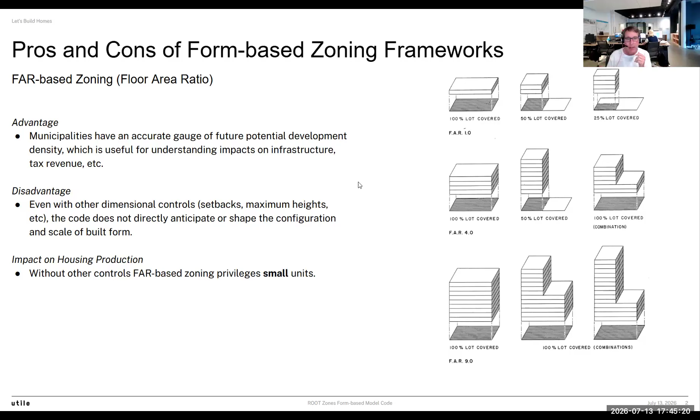In suburban locations, dwelling units per acre is typically the framework that's used. Towns prefer this because the number of dwelling units per acre means it's relatively easy to calculate infrastructure impacts, sanitary and water, and it's also a way to get a handle on households relative to planning around schools and the population of schools.

In communities where the real estate market is hot, like the western and northern suburbs of Boston, dwelling unit per acre generally privileges large units because if you can do 2 units per acre, the rate of return on your investment is going to be higher if you build 2 McMansions versus starter homes, and so that tends to be the market impact of those.

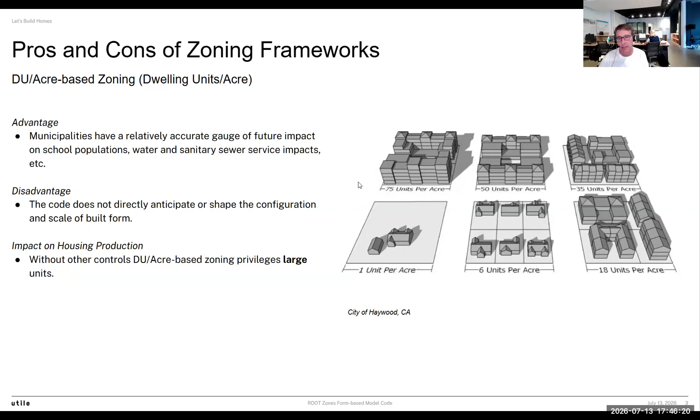A building type called a multiplex, which is really based on 6-unit buildings that are really 2 triple deckers brought together. All of the rules for the multiplex are laid out with a graphic of that building type shown. And then in some districts in the city, multiplexes are one of usually a couple of building types that are allowed.

The challenge with form-based zoning is that for many municipalities, the number of rules is overwhelming for a staff, especially for a staff that doesn't have architecture training, because it's a very architect-y kind of framework. So even the city of Somerville is rethinking some of its zoning now to make it a little bit simpler for those reasons, that it's been a little bit difficult to review and enforce.

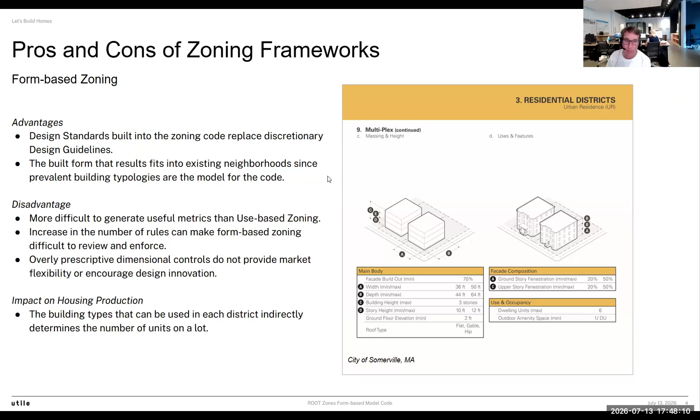In fact, Camille and I are working on that rezoning of the rezoning project. What we're recommending is something we're calling form-based lite, which is a much simpler form-based zoning that's based on really just 2 principles: a maximum building footprint - and if you think about the little plastic houses of Monopoly, that has an important impact on the size of a building that can be built - and then the building height, which is primarily expressed in number of stories, but also can be expressed in feet.

In most jurisdictions, a maximum height expressed in feet is also desired politically too. And then for some of the lower transects, a roof form requirement, which tends to be a pitched roof. So in essence, those three ingredients constitute the zoning, and this is the framework instead of dwelling units per acre or FAR or a more complicated form-based code.

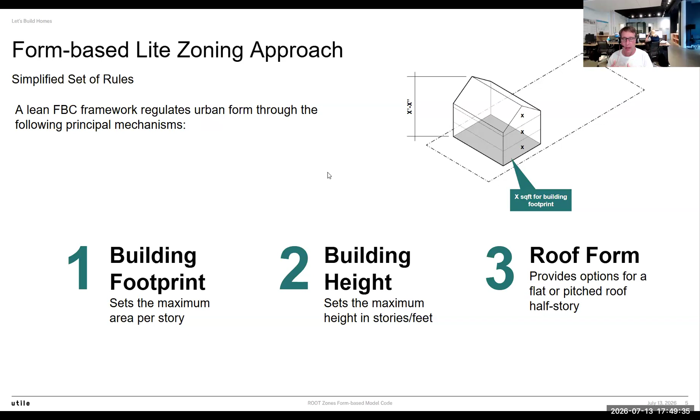That's just a graphic of the footprint in gray, the number of stories, and where roof form is impacted. That third floor in this case has to be under a pitched roof with certain numbers of qualifications.

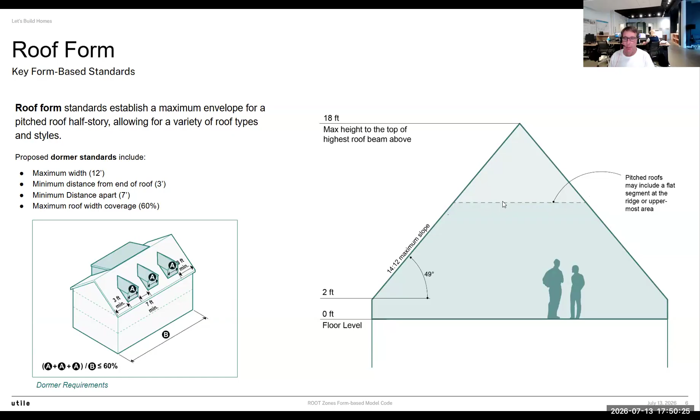Often, by the way, builders or developers will make that top of the roof flat and not bring the pitch all the way to the top.

Because the maximum footprint is fixed, you're allowed, like Mr. Potato Head, to attach things to the building volume that exceed the footprint. That includes bay windows, in some communities balconies, awnings, and even porches. And that in a way is an incentive for developers to add those things because they're a way to exceed the footprint, and it's a way to encourage the market to maybe articulate new buildings more than they would otherwise.

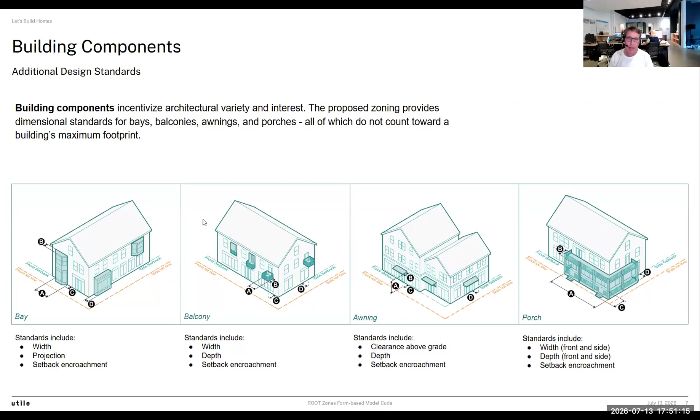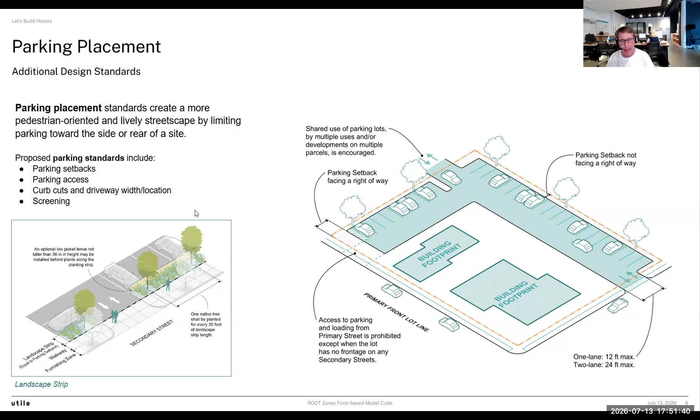So those are all of the add-ons that we typically include as part of the form-based lite recipe. And then what we tend to focus on is where parking can go—not in front of buildings, but at the side or preferably in the rear. Our zoning even has prescriptions about how to screen the parking if it comes close. So those are the basic principles of form-based lite: footprint, height, and then the add-ons and where parking goes.

The next transect up is 2,800 square feet, again at 2.5 stories, so that might be as large as a 6-unit building, maybe. Transect 3 is 4,000 square feet at 3.5 stories, and that works out well with the maximum single-stair building you can have in Vermont, which is a 4-story building.

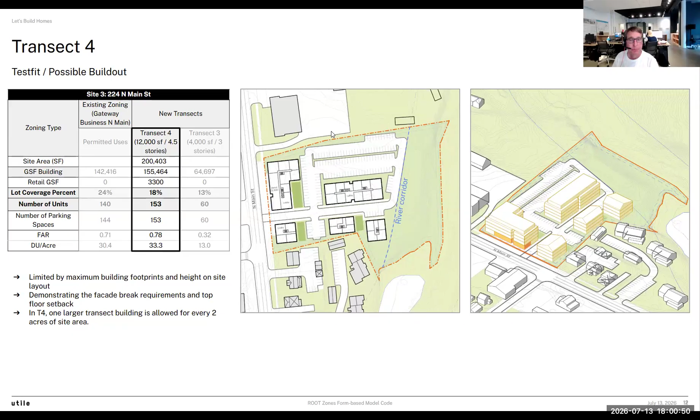Newton, Massachusetts is a city, a relatively near suburb of Boston, and because of its urban development, it has 12 different village centers that are all in a way like mini downtowns. Some of them are denser, some are less dense, but they all developed because of commuter train and streetcar lines in the 19th and early 20th century.

In that case, we developed 3 tiers: the densest at 4.5 stories and a 15,000 square foot floor plate, which we called Village Center 3. Then stepping down, 3.5 stories at a 10,000 square foot footprint. And in an early version, 2.5 stories and a 4,000 square foot footprint, which is the same parameters more or less as a Transect 3 for our draft zoning.

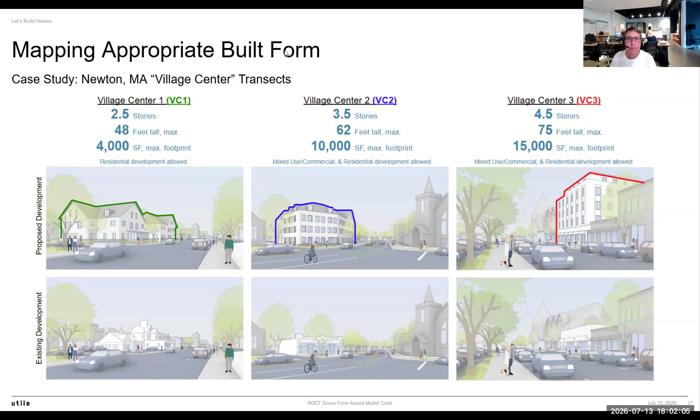And the way that we ended up mapping the districts in Newton is that it was nothing more complicated than using a kind of design eye to make the decision.

So this is one of the village centers in Newton, it's called Newtonville. These are larger single family homes, and then near the village center there's single story commercial retail. There's some older, taller buildings, a church, and new development that's been built. This used to be the rail corridor, but it's now also the Massachusetts Turnpike with the rail corridor along the side, and there's a commuter rail stop there.

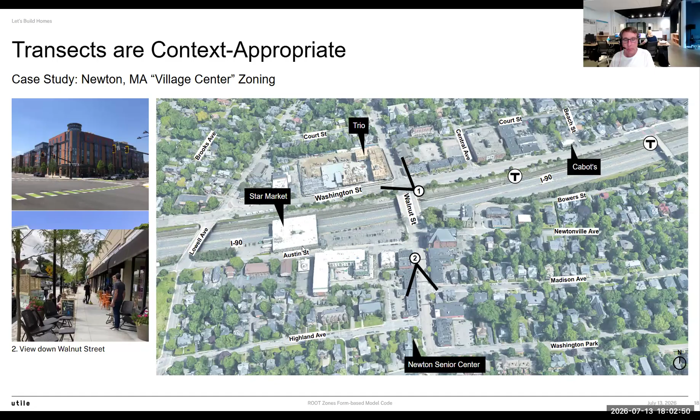I'm pointing this out because we were able to use those 3 tiers in all of the village centers. This is now a map of the entire city of Newton, except for pieces that drop off the top and bottom. You'll see that in some of the larger village centers, we use more VC3 because they're more established. In others, there's less, and in some, we don't use any VC3 at all—we only use VC2 and 1. And in some areas, we just used one of the tiers.

So in a way, this is a stand-in for the conceptual plan for Vermont, that each community that adopts it can choose which of the range of transects makes the most sense based on existing conditions and discussions about the kinds of density that are required in the future.

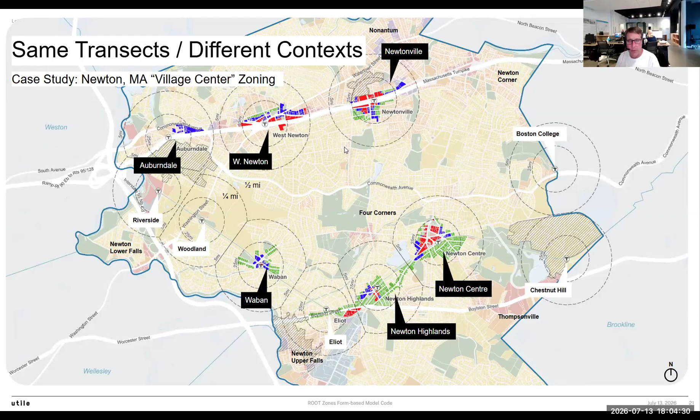So that's our presentation, just to give you an overview of what we're up to. I can return to the draft transects, and then maybe we can take some questions.

I have a question. So in the example, that first example, showing Transect 2 with the 4 units and then showing the 2 units as infill, there was kind of an explanation that there was an assumption that developers might prefer to just develop new units rather than building on. Was I hearing that correctly?

I'm hearing that this is for Vermont specifically, which is great. And I'm just curious if developers prefer to infill and build new housing with brand new developments rather than just expanding existing footprints of buildings that are already there. I think it's a great question.

I think in some cases, what this format would allow would be the construction of a second new structure on a larger lot. Like one of the examples that Camille showed, where this is a single structure on a very large lot. Following the rules for Transect 2 and being mindful of the steep topography at the back, this is a likely solution somebody might do. This could even be true on a smaller lot if there was room with the setbacks to build another structure.

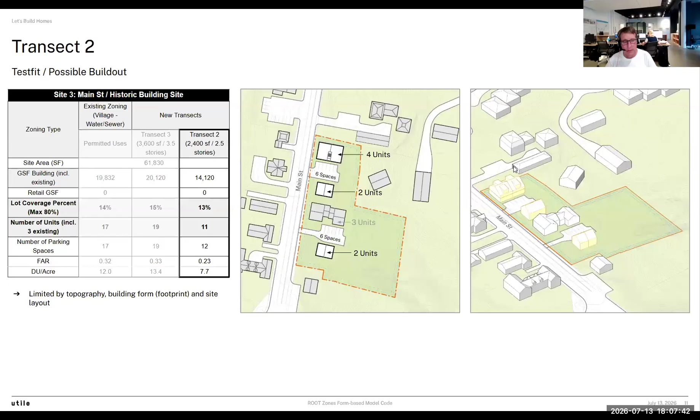Looks like we got a question from Sandy Fitzhume online. Yep, hi, can you hear me okay? Yes, can you hear me? Okay, we can. I actually have 2 questions that are related.

So say you have a transect that the community's decided could be a maximum of 4 stories, and the developer wants to do dense settlement of smaller buildings, 1 to 2 stories. Is that okay to kind of step down and actually be dense, very dense, or is that going to be prohibited?

Yeah, I think in general the spirit is yes. You could use any transect lower than the maximum transect that's allowed. It might be true there are some expectations about achieving the density with something like a cottage court or a multi-building development, but in principle, yes, you could use a lower transect.

Okay, and so in general, there's not maximum densities, right? Well, the maximum is more focused on form. That's right—the maximum is set by the building footprint. And then you can have multiple buildings on the site, but there's a requirement about how close together those can be.

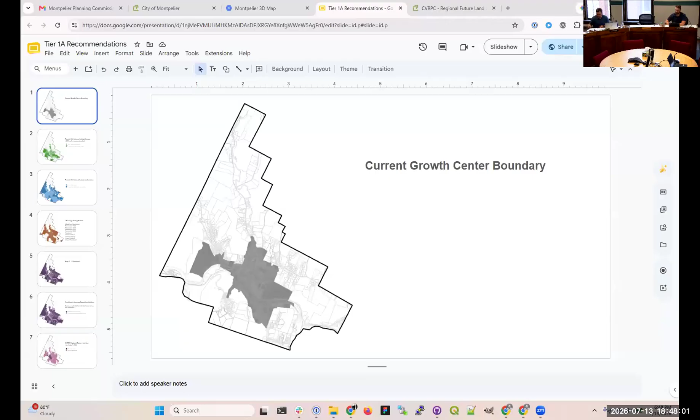Okay great, I'm going to share my screen, but before I get to that, I was wondering if Mike could give a little bit of an update on the process. Sorry, let me just clear something off my screen.

I listened in a little bit to last week's city council meeting, you were present and chatting about the CVRPC map, and I understood there was a submittal or pre-submittal that happened from CVRPC. So I'm curious what the feedback looks like now. If it's a housing committee and joint planning commission proposal that goes off to CVRPC, how does that happen? Or is it done separately, with the housing committee sending something separately from the planning commission? So the sequence of things, the process, and how we go from where we are currently.

All right, so the sequence: the CVRPC has already sent in their preliminary map to the Land Use Review Board. That's going to kick off an iterative process over the next six months. So there's going to be a review by the LURB, the Land Use Review Board. They're going to look at this and make comments, saying we think that's good, this has to get adjusted, we want more information on that area for the entire county.

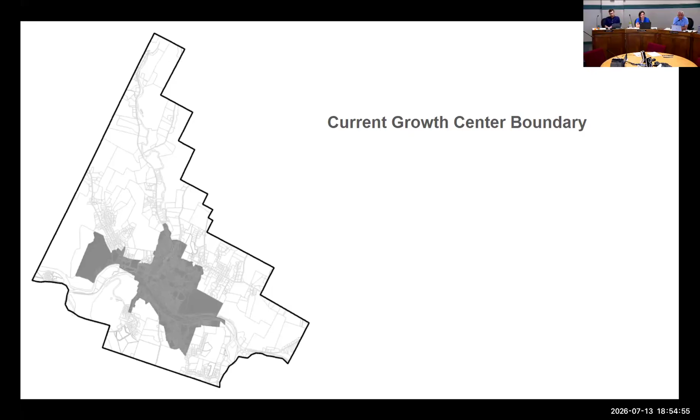Does this include any input you got from them that night? Not that night, no. It's input from Sandy and Tim from two weeks ago, which we put together. So no input from the Housing Committee? That didn't change any of this presentation. We got a basic stamp of approval with the mapping approach from the rest of the Housing Committee. There wasn't a lot of pushback, not a lot of additions.

There's one other thing I was going to say, I think I'll get to it. Oh, I added one slide in here that pulls in, I think, a recent timestamp from maybe a week ago of CVRPC's downtown and growth area, so we can compare it at the end to the proposal we put together here. All right, starting with the current growth center boundary, this is the shape we all know.

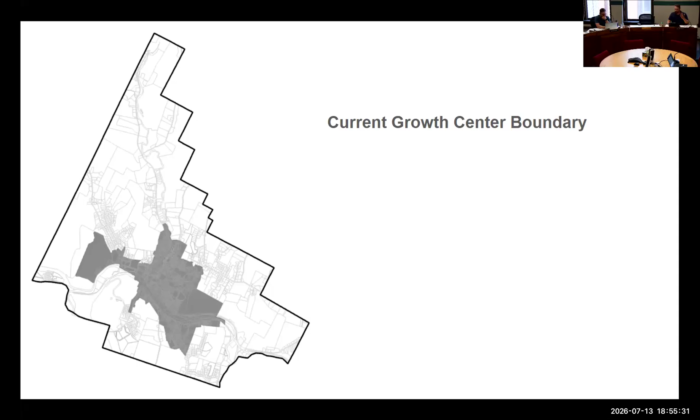One of the data layers we got from Nick was all of the sidewalks in town. This is a line file, and I added a 100-foot buffer around that line file to basically say these are the current sidewalk areas. What that allows me to do is intersect those with all of the parcels in town, to say which parcels in town are being serviced by sidewalks. With that, we see this extent.

Interestingly, the next one is looking at sewer service areas. This came to us as an area file. I didn't do any buffering on this—I simply took that file and intersected it with all the parcels.

What does buffering mean? That means you'd filter it—with lines like the sidewalks, if it's a point location, the place that intersects is really just one spot, and sometimes GIS data isn't terribly accurate. Also sometimes sidewalks are on one side of the road, so it might catch parcels even though that's really a sidewalk area. So if you buffer it by 100 feet on either side of that line, then take that area—buffering means you're adding area around it. You're taking an infinitely thin line and making it 100 feet wide, so that way you can see it.

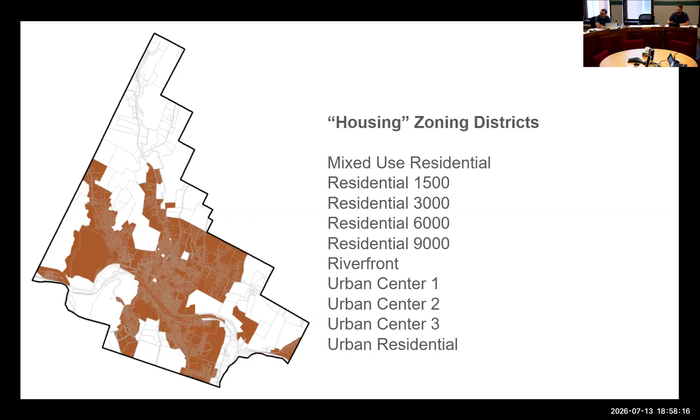Can you go back and forth just so I can see the difference? So it's basically the same. It's basically saying there's a couple of small additions that you get from this.

Okay, and then with that, we have maps 1 through 4 combined. So taking all of those ones that I just presented and combining them all into one big potential growth boundary.

You will see some holes in here. We did take out the State House, the St. Augustine's Cemetery, municipal buildings were taken out, parks were taken out. So those are just areas that will never be developed.

And then what I did was present this to Tim and Sandy. And then we went through the interactive map that I also sent along, which basically shows these exact layers, but we dove into it a little bit further.

And they wanted to expand in some areas. Like, let's think more creatively here. Where could we potentially expand both sewer areas and sidewalk areas?

Sewer is really, is my guess, the bigger issue because with all of the topography that we have in town, if we're going to avoid building pump stations in different areas in the city, where can we connect to that could potentially gravity flow to our treatment facility? So we kept that in mind as they then added these additional parcels.

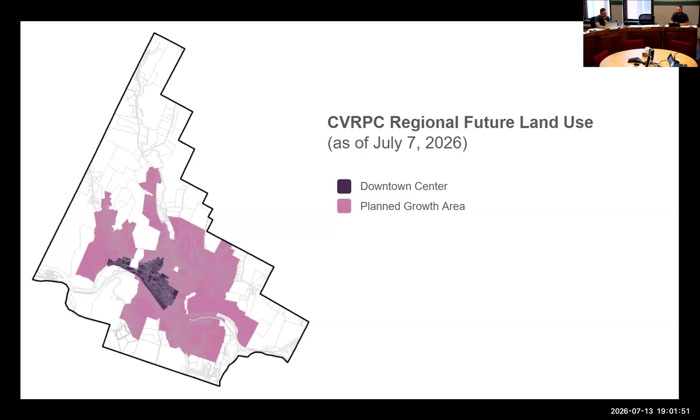My only comment, I think, with this is, and Mike's comments in the beginning, I hope that the LURB comes back to the CVRPC and says to them, we love this so much, consider expanding it to be twice as much. And then they'll be very happy to see this map.

Well, it does sound like we can give them a comment now, though, right, Mike? I don't know. I'm sort of being a little bit anxious about how the LURB is going to respond to any expanding future land use areas. Maybe I'm being too cynical, but that's one of my.

Yeah, it's interesting. They have an executive order from the governor to do everything that they can, but then the tone that we had when the CVRPC came in, it was not very open, right? Exactly, sort of like, we're going to tell you, and that they're going to tell you, and so it wasn't very heartening to hear that.

There is a required methodology they're following, and that's a lot of the issue. I know you put them in as ands, but in their methodology it's you can do this or this, and this or this, so it's a mix of things, not everything included - sidewalks, and...

My concern, when you look at physical infrastructure on the ground and you're talking about future land use, is that represents in my mind everywhere we have sidewalks right now and everywhere we have sewer service - that represents current land use. So when we're talking about future land use, 20, 50, 100 years from now, why would we ever box ourselves into current infrastructure?

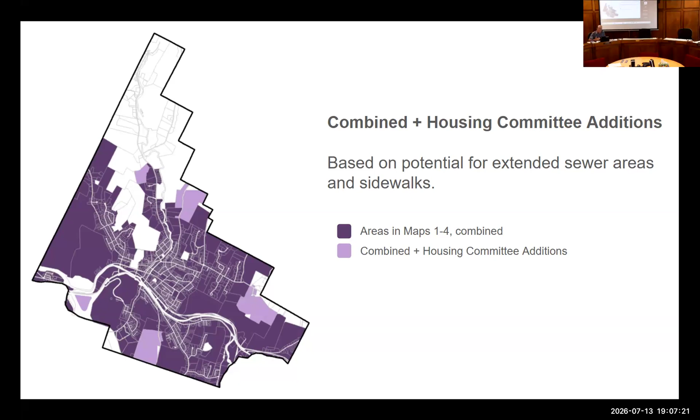I can go through a couple of things - I made a presentation to city council, and I can go through that if you want to stop sharing really quick. Oh yeah, pop yours back up.

All right, I'm just going to jump in here and see if I can close this down. It's kind of annoying, I guess they're not letting me do that. Put that over there—upper arrow. Oh, this one you think? No, that's sort.

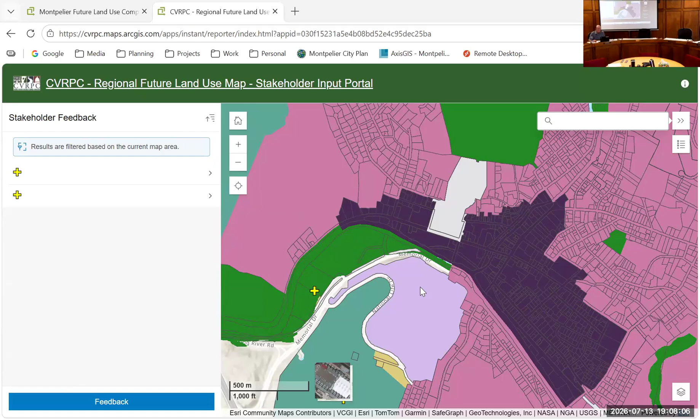I wanted to go to this one really quick. So this is the map that they have, and I'll go through really quick what I presented to City Council. I think there are a couple of places, easy changes for us to make recommendations on. We've pointed this out many times.

This is Independence, and those sidewalks are out there. It's on Route 12, there's a bus route out there. There's no reason this shouldn't be planned growth area. Zooming in on this stretch, this is next to National Life, on Mountain View Drive. There's no reason for that not to be in the planned growth area.

I'll just keep going around counterclockwise here. So this area we just talked about, these are the areas that are conserved. The water and sewer doesn't come out this way—actually, this is the one that's conserved here. The big green one is conserved. These are ones that must be in current use or something, because they are in the forest ag designation.

This is Hill Street coming up through there. This is Berlin Street coming up through there. So again, I think Berlin and Sherwood absolutely should be in planned growth area. The sidewalk ends here, but it does go down the hill. So all of this could easily be in.

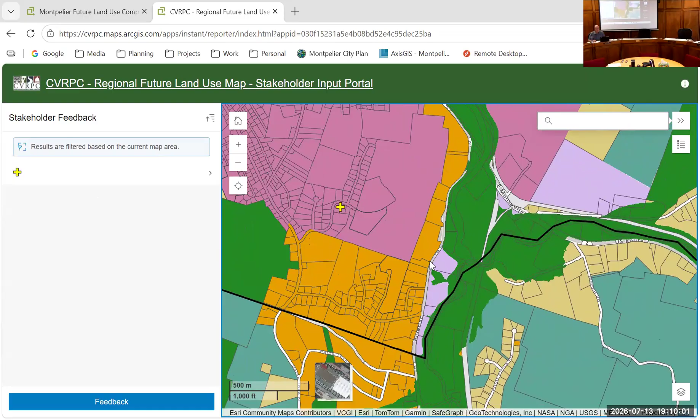The hard part comes in down here, along Route 302, River Street, until we have a determination that we're going to have plans to change that. The green area—I'm sorry, why is it? What do you mean, why is it hard?

Because this is called transition. The orange one here, you see what they call it—transition or infill. So that's not planned growth area. It's an area that would need to transition. And because there's no sidewalks there and we have no plans to build sidewalks there, it really doesn't count as planned growth area. It's an area that needs to transition.

But the rule in effect is that any area that is floodplain has to be conservation unless it's in the designated downtown or growth center. So that's why you see all of this as green—it's because these are either wetlands or floodplains or are conserved. That's why you see all this green area through here.

I also pointed out to them, this is wrong. This is in the plan, this is in the growth center. That floodplain should not be there, so that's an error to be fixed. That's Sabin's Pasture. So that's some of these things.

That's why this area out here, they have as rural general, for Gallison Hill. I think that would be transition infill. There's no sidewalk on Gallison Hill, even though it goes up to it. So again, if we were to go through and say we do have a plan, we're going to put in a sidewalk, we're going to make this work, it would qualify under the rules.

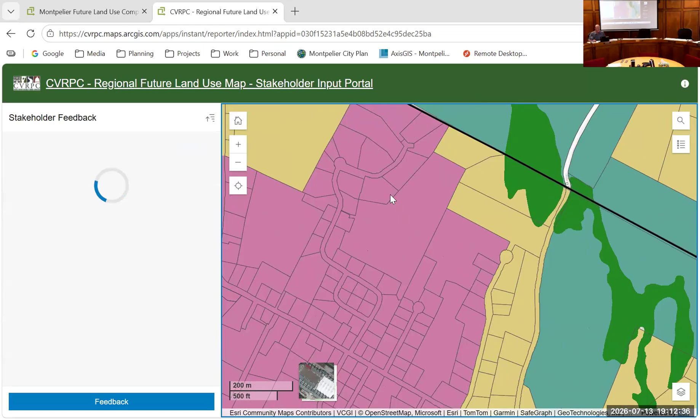The left side of the street is in planned growth area, the right side is not. That should all be planned growth area because the sewer comes out here. So I would add those in.

I had done a side by side for them. The other half was our future land use map. I think this line right through here looks like they fixed that one though. This was a mistake at the council meeting that is now fixed.

I think this strip of yellow should be pink. Yellow means rural general, and that's next to the park. There's the swimming pool right there. That should be planned growth area. If you're building within this 100 feet, you should be able to benefit from that. I think there are a number of areas like this we could talk about.

Yes, this would be the stump dump. If we talk about putting that in, that's an idea.

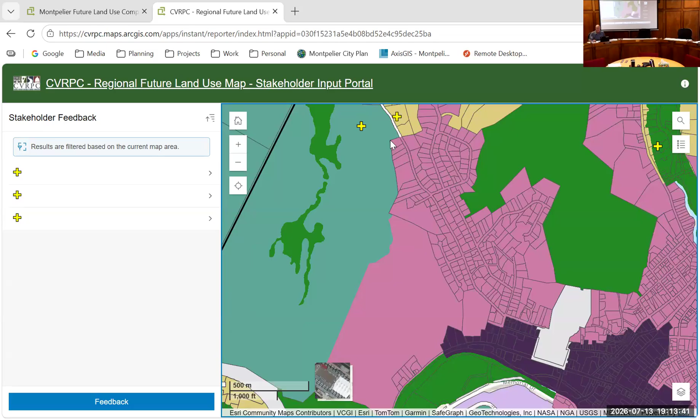I think a lot of this was very similar, but Alan had talked about this - this is Crestview. Our zoning district, our Res 9, kind of kicks out and captures some of this and some of these other areas. So this area could move out. This is a much smaller version of what I think should be over here on this side. So we have a lot of these really easy wins we can go through and say this and that.

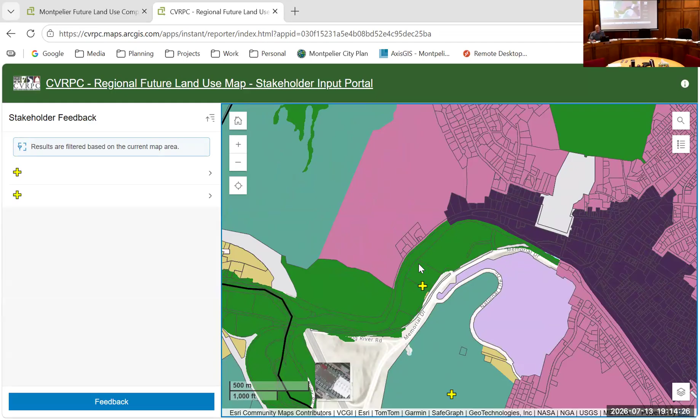The last thing I wanted to point out that I didn't talk about at the council meeting, but I want you to have in the back of your mind, is we talked about this area down here - this is the school, Department of Labor, liquor, Green Mountain Power. I'm talking with Christian and Brian at the RPC, and I'm going to shift ourselves over to Barre City and zoom in to the north end of Barre City.

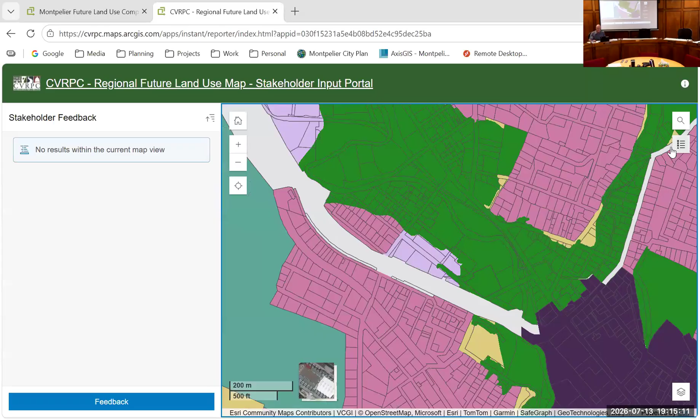So here's this area of white. This is Route 62 coming on down into the intersection, and you come down into the big purple area of their designated downtown center. They have a lot of pink around here for their growth, their planned growth area, which is great. But they also have an awful lot of area that is now pinched up. That's Route 14 going up. All this area, because it's not in their growth center, is all classified as conservation.

If you're trying to orient yourself - where am I? If you come to the end of Route 62, you go to the light, make a left, you're going to go past Beverage Baron on your right. Cumberland Farms is out there, on your left. Your RK Miles is out here. It's conservation.

It would not get us into the planned growth area and remove us from Act 250, but it would get us out of this type of conservation designation. They want to create a new district and add it to the methodology that anyone in the state could use, called resilient infill.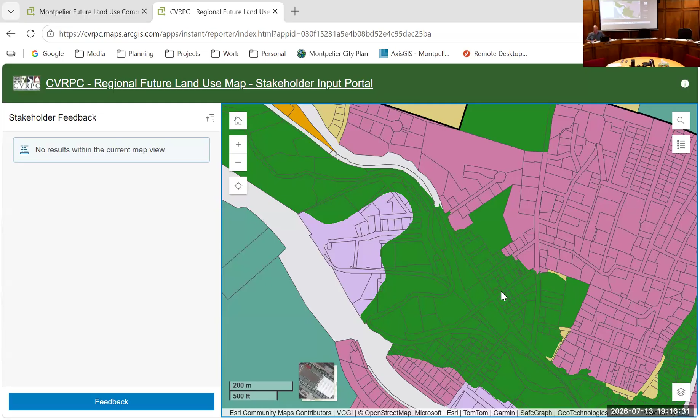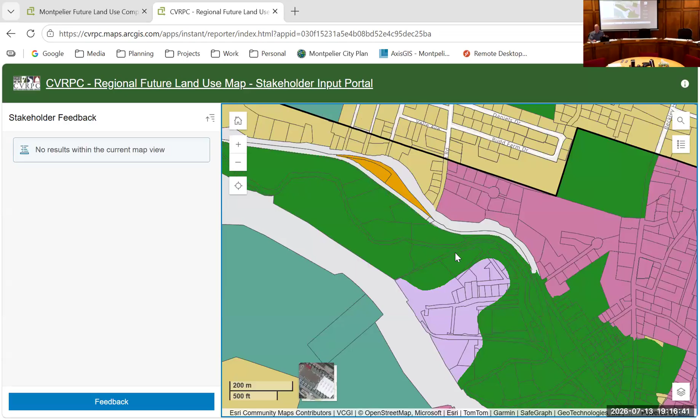The point of that is to look at areas like the north end of Barre, North Main Street in Barre, and our properties as well, so we can go through and say, hey, it doesn't make sense to designate the Department of Labor as conservation. It just doesn't make logical sense. If something happened there, or if we're going to do some infill, we're simply going to elevate the building.

A lot of these maps treat the floodplain such that a 100-year flood event, where you've got 1 inch of water on your property, makes you conservation. We're like, I could elevate my building 2 feet and never get wet. But it's like, that's not good enough, can't do that. Well, for existing developed areas - now in a rural area that hasn't been built out, that makes a lot of sense. We should conserve as much floodplain as we can.

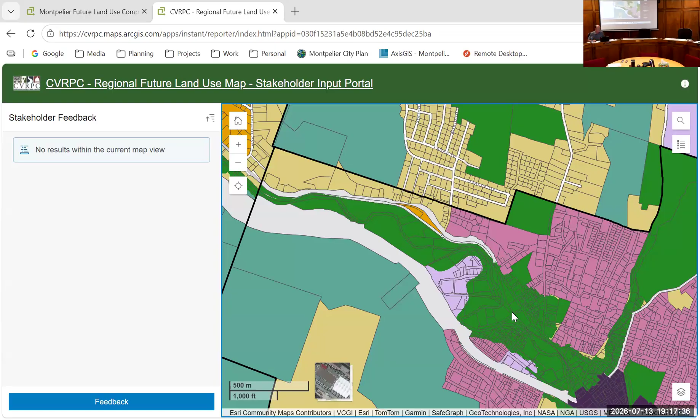But if you're downtown Montpelier or downtown Barre or maybe downtown Northfield or Waterbury, I'd bet it's similar - they're going to have a lot of these green zones that might make you scratch your head, like the whole downtown. Because they have a designated downtown, otherwise they would be in the same situation. You can see this is Waterbury's village - it's still a lot, you still have all the area that is State buildings.

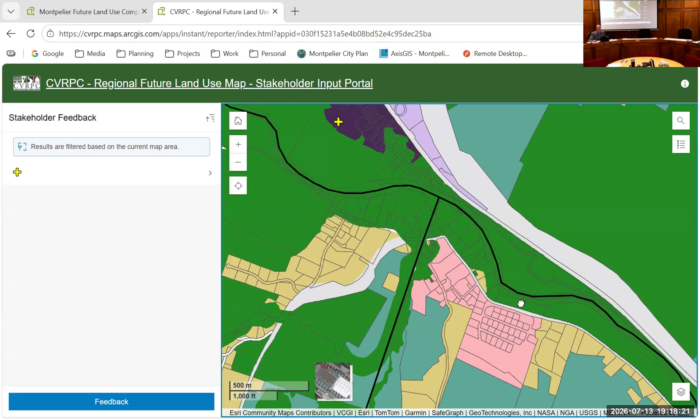Heading out towards, not Duxbury, but out towards Middlesex on Route 2, that intersection, you leave on Main Street, you'll leave their designated downtown. And as soon as you do, all those buildings out there, including their ice skating rink, are all conservation. So you see a number of neighborhoods that are kind of hiding out here.

So that's a little bit of what they're trying to tackle with, and we're surprised we are the last region to submit our maps. We're really kind of surprised - how is it we're the first ones who've kind of realized this is a big issue? But we're going to go to the LURB, make a recommendation. I think it would be good for us to go in, kind of supporting their idea.

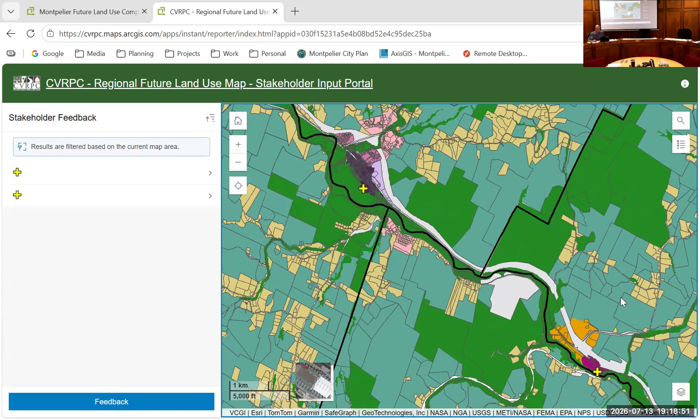Which for us, as I zoom back in, is really impacting mostly in this area - our area, which we said, hey, we want to make this mixed use residential too, big buildings. We could have infill here in the future if something happened to the Department of Labor building, or the Department of Liquor building, or GMP, or the school decided it was going to consolidate and this would become available for some other use. We could build in this area provided it's built so many feet. But because it's not in the planned growth area, it wouldn't be tier 1A, wouldn't be tier 1B. We'd still have to go through Act 250, but it's not designated conservation.

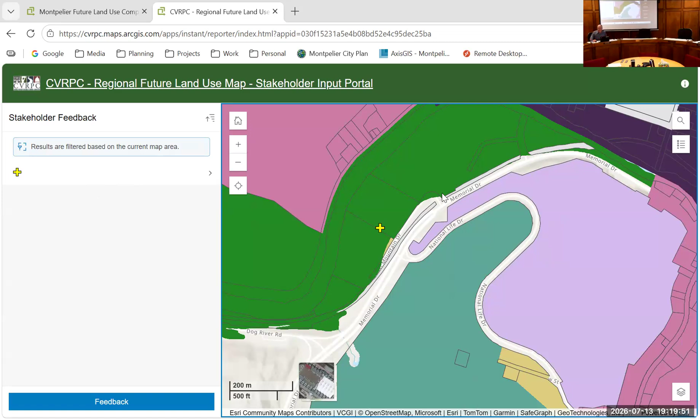In the future land use map, which may come up to bite you if you do have to go through Act 250, and you have this requirement to be consistent with the regional plan, and your regional plan says you should be conservation. So that's a little bit of the thoughts.

So how did this overlap - what you had presented versus what Mike just walked through? Well, what Mike just walked us through is some of the thinking that the planning department has had in terms of further expanding what CVRPC has already put forth to the LURB.

My recommendation from here would be, I would love to, if we have some consensus here with the work that the housing committee has put together with my help, send this over to Mike and the planning department and sort of figure out what are the areas really we're going to take away at this. So not expand it, but pull back. You're always welcome to expand it, but where have we gone too far?

I can see, for instance, where you mentioned River Street, Route 302 - if that's not in a city future plan really to expand sidewalks, for instance, okay, we can take that out. Parts of Eastern Gateway, we can take out. That would be my recommendation.

And then we have a map that, I don't know, the housing committee and the planning commission is putting their stamp of approval on to send forth to CVRPC. What's the format for the input that we would give? Is it a letter? Is it a map? Is it both? What is it?

I think it's going to be probably a map. We'd probably have an annotated map with a memo that would go through, because what we're going to want to do in some of these cases, especially where we say this is an error, we're going to point to the thing and say that floodplain shouldn't be there because of this section. And the other ones we would go through and cite very directly, according to your methodology.

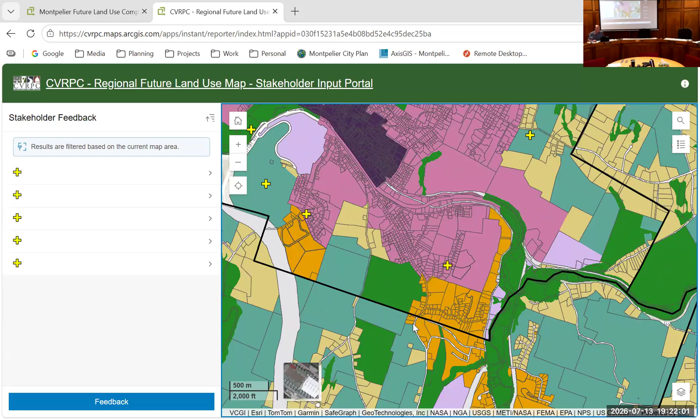Because when we did our future land use map, we followed this methodology to create our future land use map, and it included this area in pink, and it included all of Sherwood and Berlin Street in pink. I think we disagreed a little bit on the colors down here - we had them blue, they had them orange. Doesn't make a big difference.

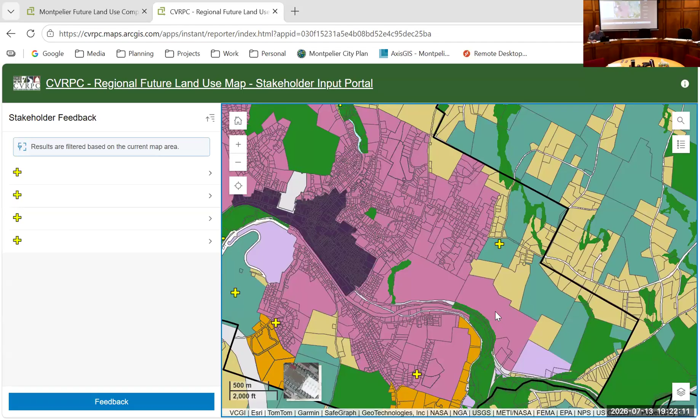And process wise, what was the timeline again? We have one bite sort of in July, and then they're going to rule on it in August. We'll have one more meeting. You guys will have another meeting in July, so we could put together a memo and kind of decide how we want to do this, and then you guys can vote at the next meeting to go through an agenda item for the next meeting to look at that.

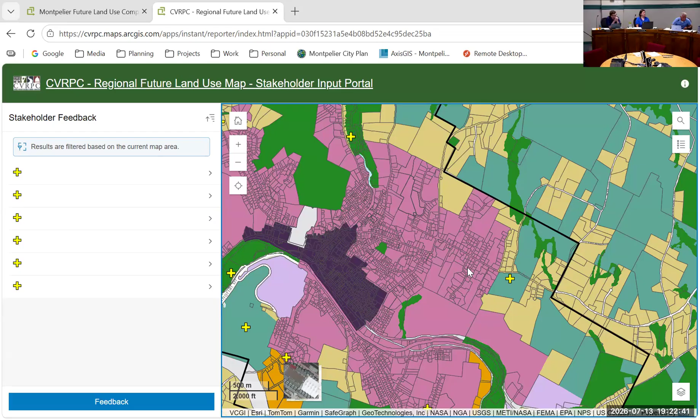Sounds like we don't have much time if we want to do something. But you don't have to make a decision tonight, but it is something we would want to think about, take input from.

If people in the public have an interest in giving us input, please send it to the planning commission, and I'll forward it so the planning commission can consider it.

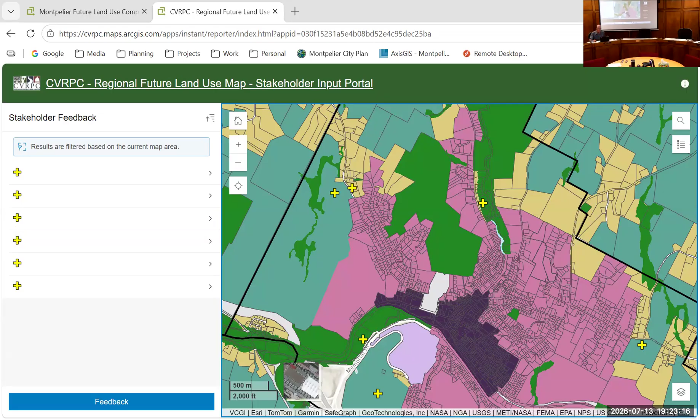How far out do we try to go with some of these things? I think Nick did a good job when he read the rules and followed them. Our future land use map, which I don't have up right now, followed the rules and covered a lot more area than they had. But I think we're like 90% there.

We can get another 10%, and if we can start to work with the RPC to say we support the RPC's interest in creating a new district, we think that district would apply in this part of Montpelier, I think it'd be really good. You've got a housing task force that's really super competent, and we have a GIS expert that worked on it.

I think it'd be great if we can mesh something combined that we can really feel is Montpelier's very best thoughts. We had some really good people work on this along the way, so maybe there's some things from Tim's that you can pull on. And I think eventually it would reach a point where we say we have some other places that we have interest in. I don't want to put us all into one bucket and then have them start to throw out the good things with the bad because we overreached. We really want to lay this into a couple of buckets of things that are errors that can be fixed.

These are things we think obviously meet these rules and should be in the planned growth area, period. There's no reason they should not be. Then we have these other areas which, getting to Tim's and the housing committee's argument, we think there are opportunities to further expand on these. This is where, despite the fact that it says we don't meet it, we wouldn't say it that way, but effectively that's what we're trying to do: say it doesn't meet the rules, but here's why you should approve it anyway. I think that's where we've got to be creative, and I have to lean on you guys.